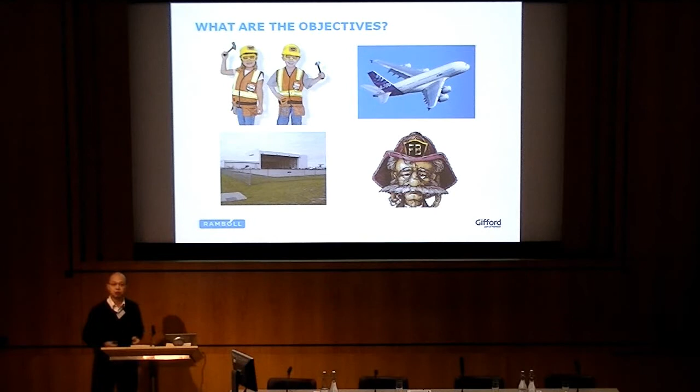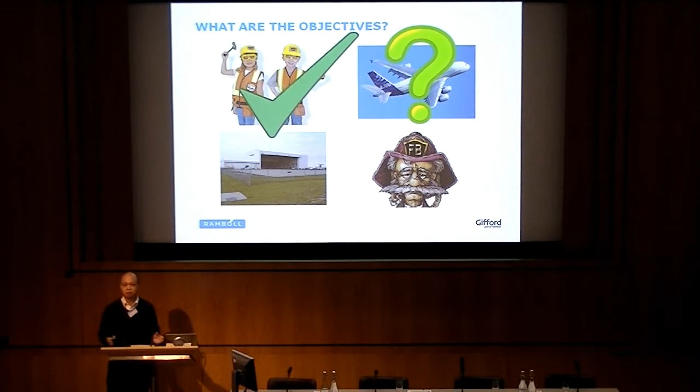When I think about what we need to protect, what is the fire strategy for? Definitely the workers - life safety is our fundamental principle of a fire strategy. And then, is the aircraft important? It's expensive, but is it important? If I never travel, it doesn't bother me. Is the hangar important? Can they do maintenance not in a hangar?

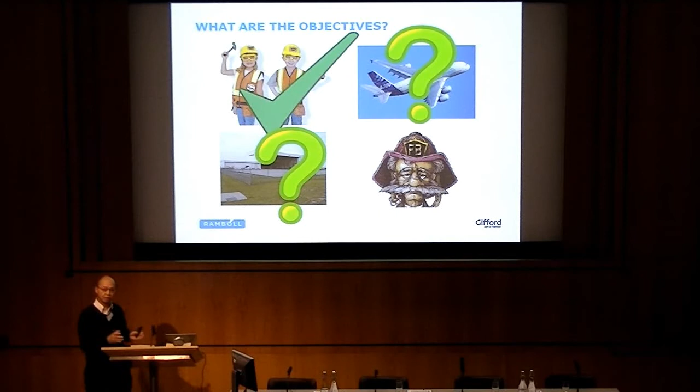And I will question, because it's property protection - it's the same, if I never travel, is it important to me? And fire brigade is also very important, but from their point of view, they would not go in if there's a fire. So at least I have the principle - life safety. But in terms of the aircraft and the hangar, I need to know what the clients want in order to develop our fire strategy.

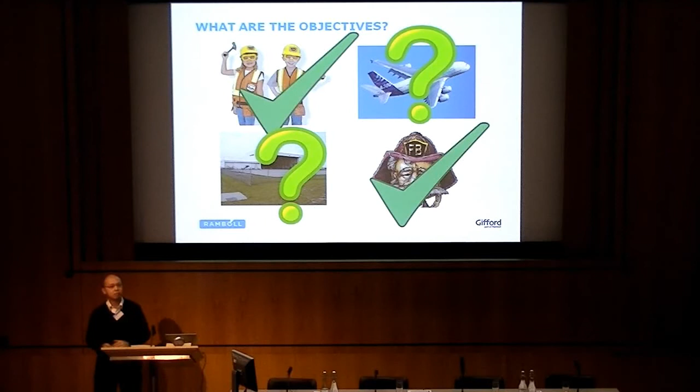What fire code do we use? In the UK, I guarantee there's no fire code related to a hangar, but it allows you to use the principle to develop a fire strategy. The UK likes to use passive fire protection, like putting in compartments and walls to seal everything off. But for a big hangar project, you can't put a wall in the middle. America has a specific code called NFPA 409, particularly designed for hangar projects, but they mainly use active fire protection. Okay, let's have a look.

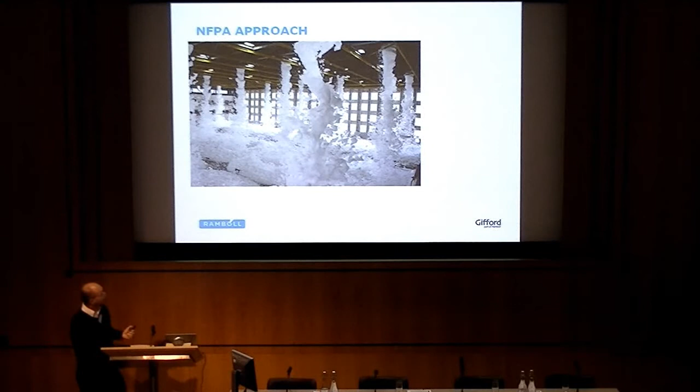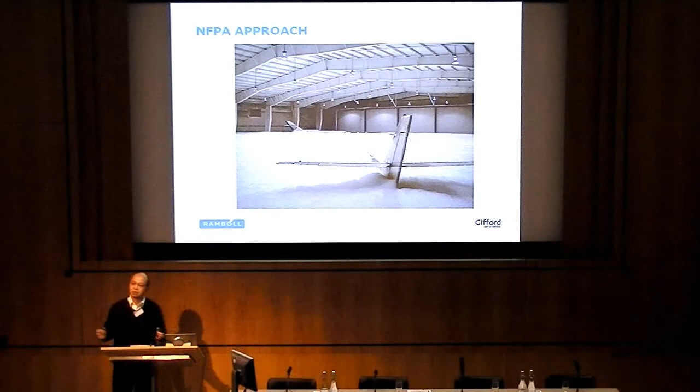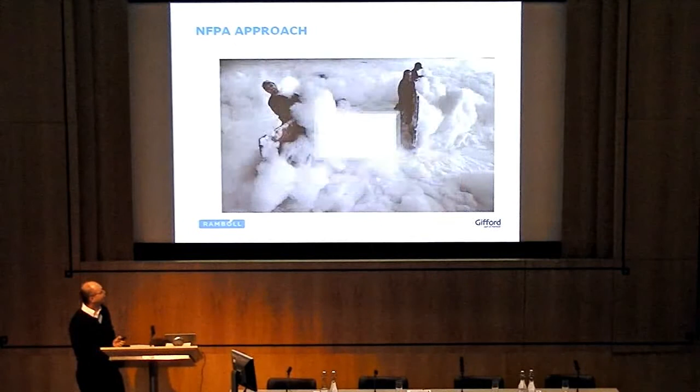And then the question comes up - if there's a little accident at the corner, it floods everything. Oh, I don't like it. And then the aftermath - yeah, it's bizarre.

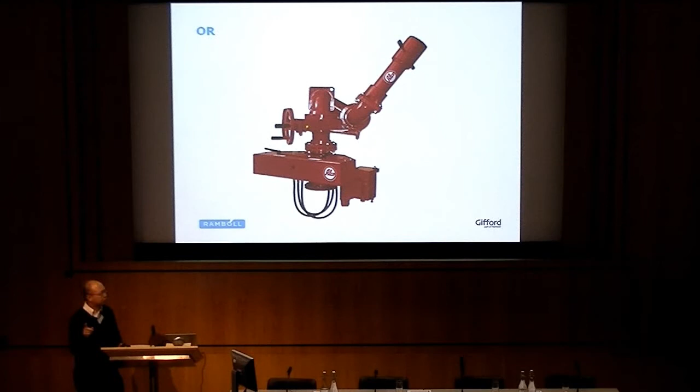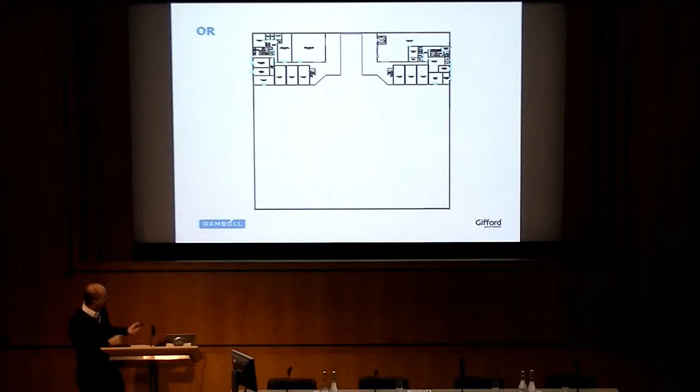And then there's an alternative, we call it an oscillating sort of nozzle. It's positioned in the best location - in case of a fire, it spreads the foam like that. This is the hangar, this part is where you park the airplane, and this is the back of house. It's strategically located in 4 positions, and if there's a fire, it spreads to cover the potential fuel spill location.

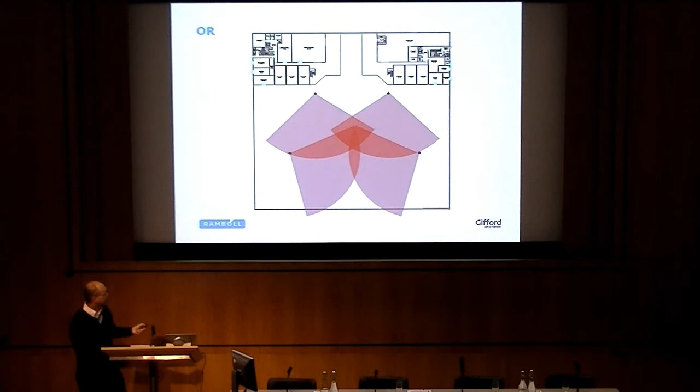Yeah, this is another example, and this is how we operate.

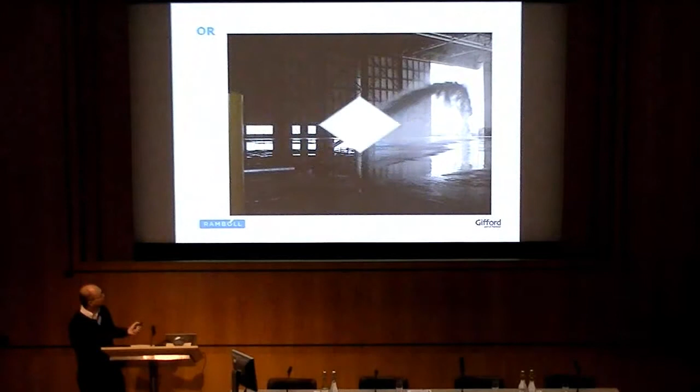Yeah, this is how we operate. But there's a problem: when you have a lot of stuff, you get blocked by your stuff. Although this is related to maintenance or management issues, it happens.

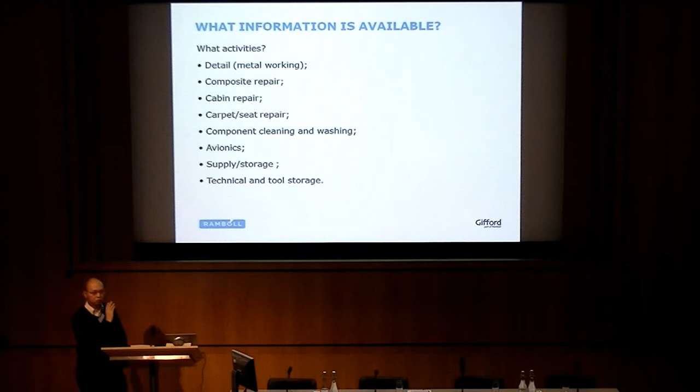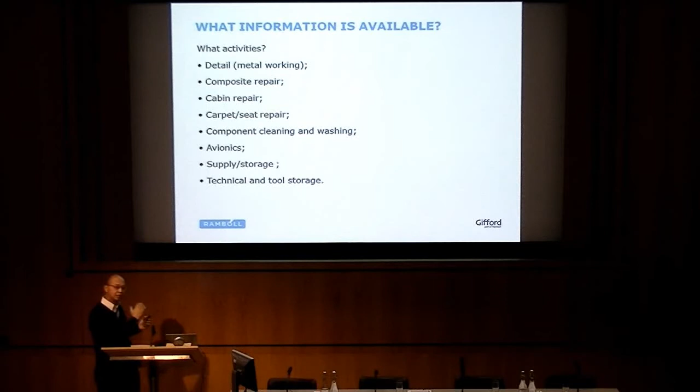We know the principle, we understand how it works, but is it necessary? I asked the client, asked the operators, read a lot of articles, and understood what activities they're going to do in the hangar. It's important to know, but we don't necessarily need to understand how every single thing works, and also what is given.

But the first thing is quite crucial, right? In the beginning of the project, they said it's only to park the airplane here, there will be no fuel. Then after 2 meetings, they came back and said, well, if there's an incident and the plane is ready to take off, that's a problem—they have to drive it in there. This means it will be full of fuel. So we have to consider fuel as well.

Fuel is the most likely source of a large fire load. I'll explain a bit later. Kerosene, Jet A—to be honest, it's really safe gasoline compared to the petrol we use, but it is less safe than diesel.

It's quite high, and we create a smoke reservoir so people can evacuate. The temperature at the roof is not likely to cause structural failure due to fire suppression, if the fire suppression works. I will prove whether it actually works or not.

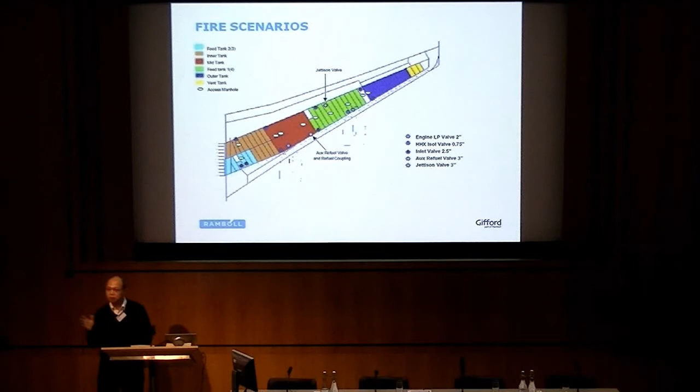After all the information I have, what is known, I need to start my research, start my data collection in order to do the first principle fire strategy.

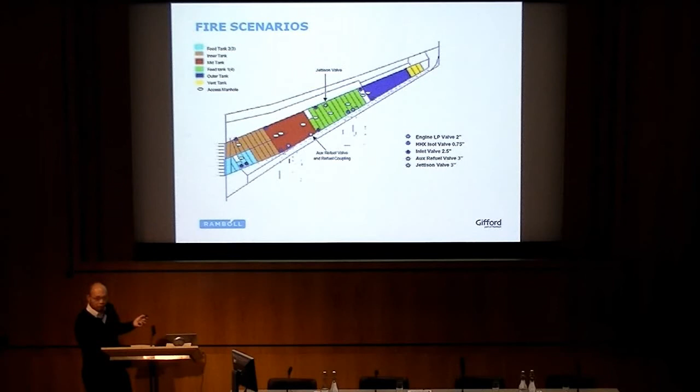After searching a lot of information, I found different fuel tanks, and the size, and how we're going to do maintenance. We ended up finding a tank with an inner tank of that size. The possible risk is when they maintain the coupling or the pump and that fails, then the gas or fuel from the tank will flow to the floor.

This is how the first engineering bit comes from—it's a conservation of energy, from potential energy into kinetic energy. Yeah, everyone knows that.

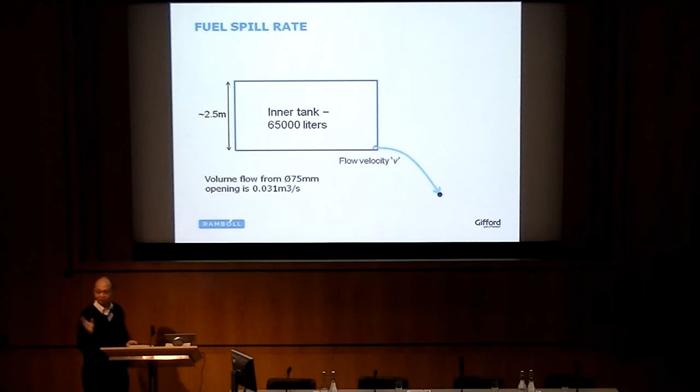What next? To be honest, this is the most difficult part. I tried to search, tried to find information—what happens if water type of things are put on the floor?

I did it with my team—I actually put water on the floor and asked, what do you think? It's really difficult to predict what happened.

The design team gave me 3 possible solutions in terms of the drainage system, for how to drain the water or whatever. Actually, the drain is to collect all the spilled fuel, and I don't know whether they reuse or recycle it.

This is the exact drainage strategy for Hangar 1—that's the one next to it. This is the leakage hole, and the potential fuel spill to the floor is that size.

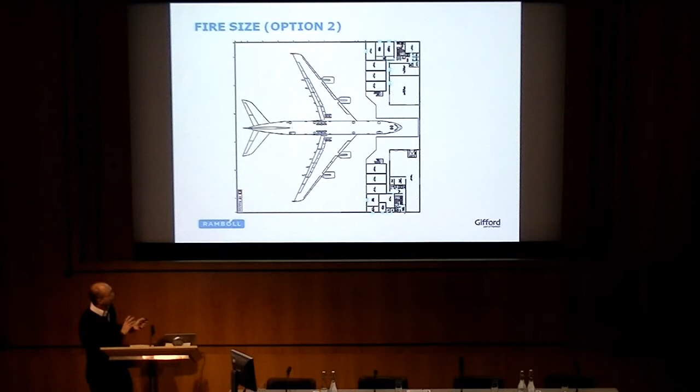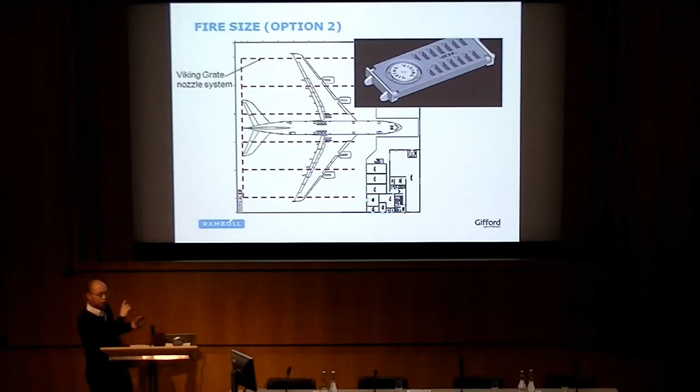For the next one, we found an interesting fire protection system called the Viking Grate Nozzle System—I'll show you the picture of how this works later. The potential fire size is beside that.

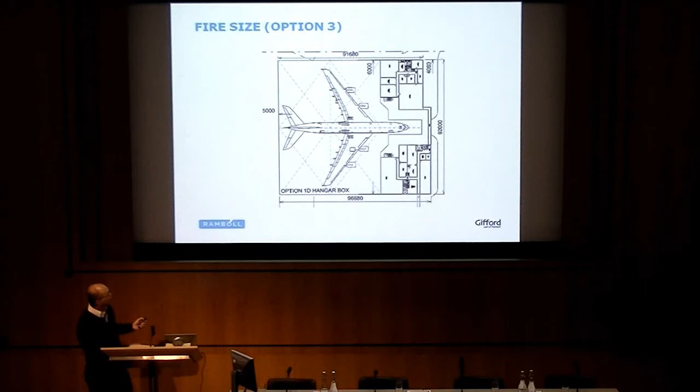The third one is what the design team proposed—4 locations, and there's a potential size for each.

This involves a lot of consideration, like whether the surface of the floor is smooth enough for the fuel to spread quicker, how thick the fuel is on the floor, and how quickly the fire spreads from one point to the whole fire size. There are a lot of questions to answer.

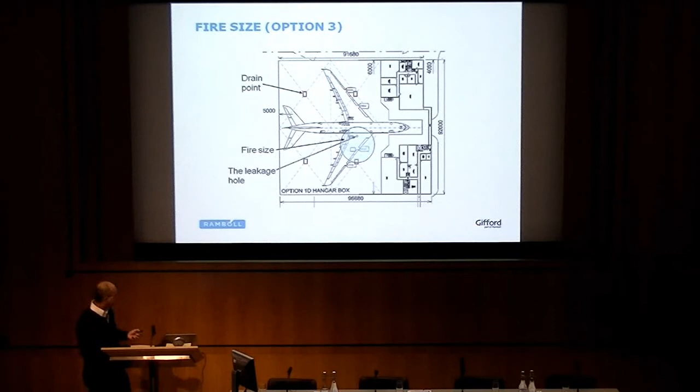But I managed to take that information, based on published data, research papers, and other information, and ended up with this summary of the fire scenario.

We know there's a tank size, and then we know the opening size. The way that it flows, 31 liters per second onto the floor. And then when we have a fire size, we have to apply a 155% factor when you do the heat release rate calculation, and end up with 398 megawatts.

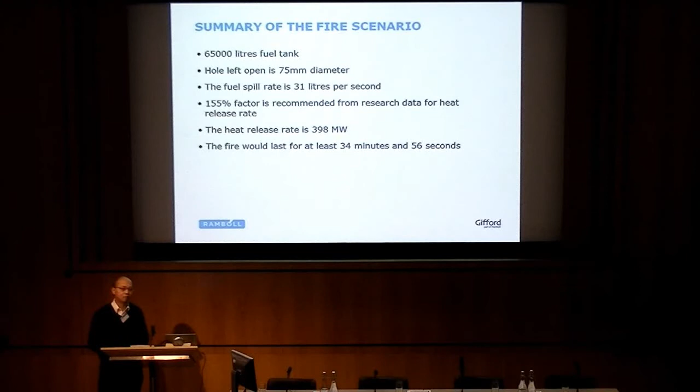I don't know if you've seen a normal car burn, yeah, you see a lot. That fire is talking about 4 to 8 megawatts, a normal car fire. And now we are dealing with 398 megawatts. It's huge, it's huge. When I got that result, I was frightened, like I am now.

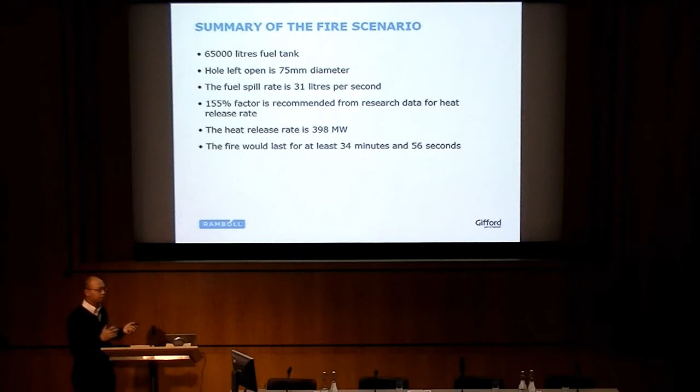And when I do all the calculation, that fire would last for 34 minutes. It's a really long time. Then will the hangar survive? Will the other things survive if the fire suppression system doesn't work?

And then I put it in a CFD because we can't do a test like Anton. We can't do tests, yeah. And the first 10 minutes is quite a crucial time to suppress the fire based on NFPA.

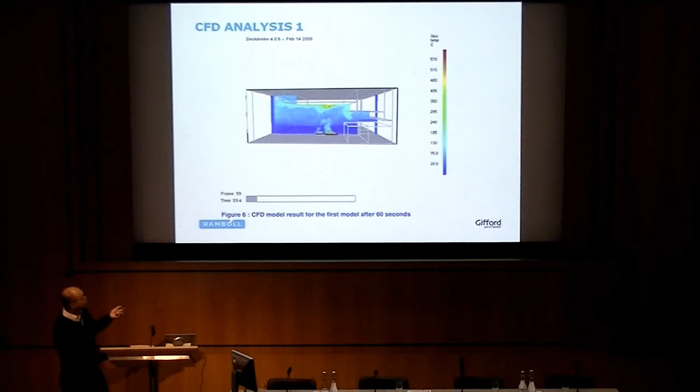And then I had a look, and you can see it's only a little bit here that is around 570 degrees. And the majority of the area or the volume is quite low, around 200. And the condition is the opening to outside, or the door to outside, fully open.

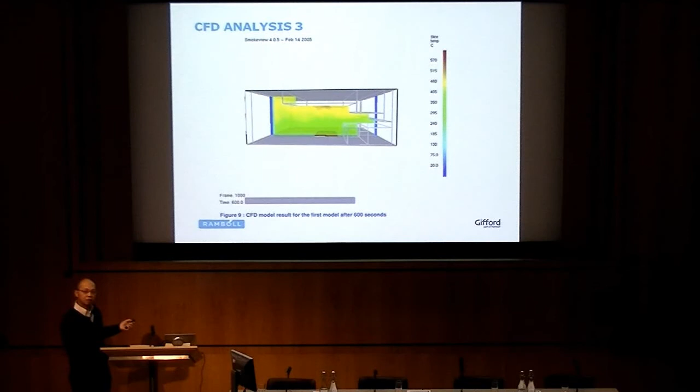And the temperature is reasonably low, and that's why from that we can say it's not necessary to do any steel protection to the roof. Yeah, it saves a lot of money.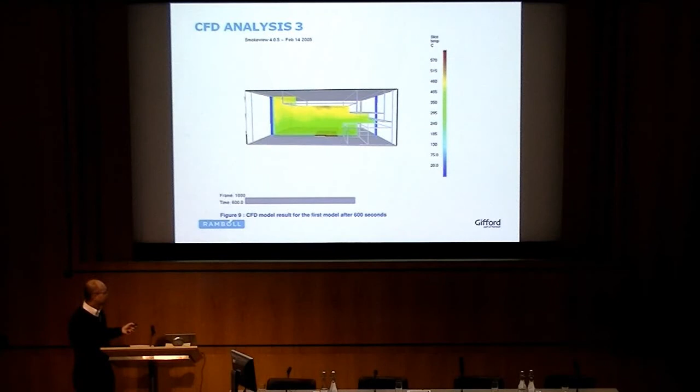After we've done that, and we understand how this works, we develop the fire size, and then we go to the fire detection system. This is different to a smoke detector or heat detector here.

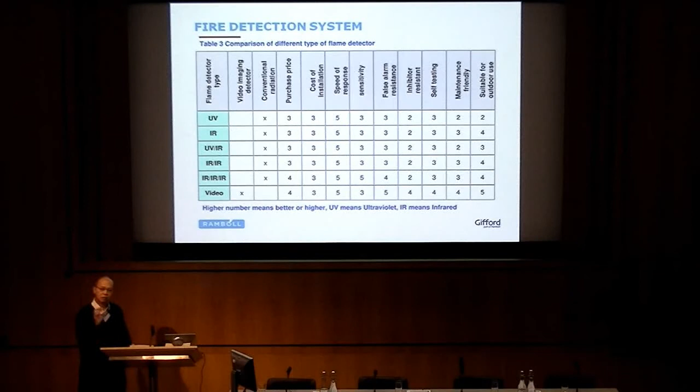It is really specific. We don't want sudden accidents. We don't want false alarms. Any false alarm will flood the place, and you can't use the hangar.

And then we also need to understand they do welding, they do hot surface things, they do some maintenance. You have to allow them to do something.

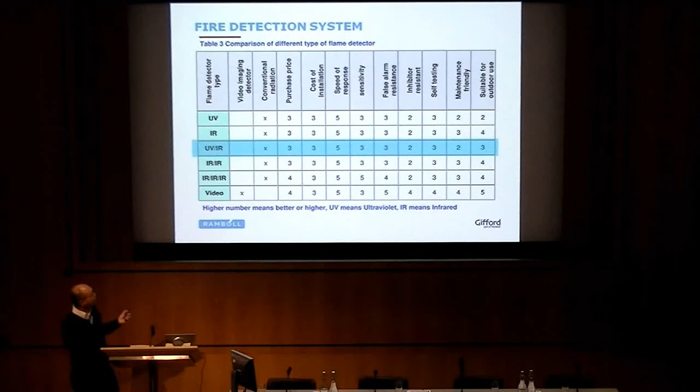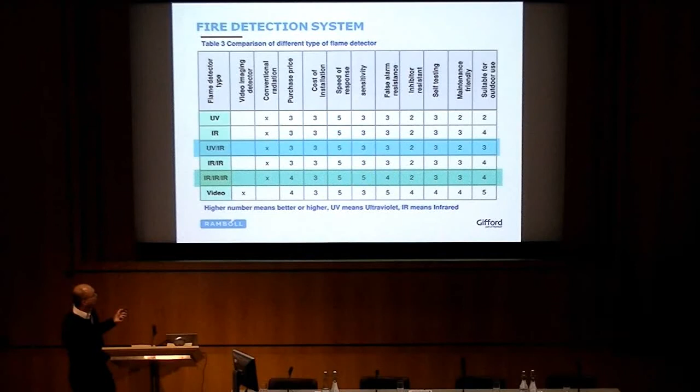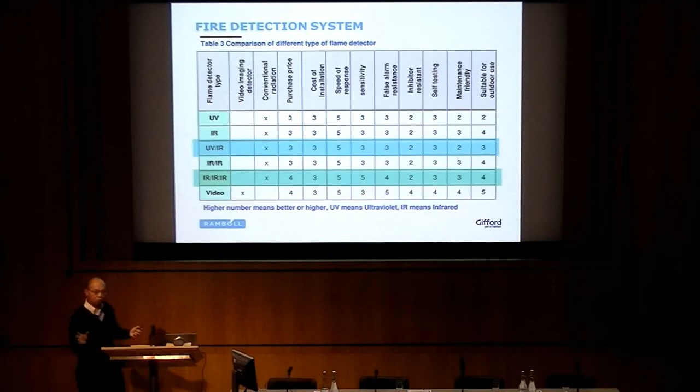And also at the same time, there was an accident at another airport where there was a training ground quite close to the hangar, and some of the detectors detected the training ground fire and flooded the whole hangar. We don't want that, and we think IR is a better solution.

And we also recommend a fire suppression system. This is the one that we saw before. And when there's a fire, because it's quite close to the fuel base, it will tackle the fire within 30 seconds. Yeah, and this is a new product.

We recommended that Kayan fly to America to have a look, and they ended up deciding not to build the hangar too. It's a shame.

But it's good that we told them there are things in the market that are new. It's important, it tackles the issue, and this is surely what they want. If not, they wouldn't have spent time going to America to see that design.

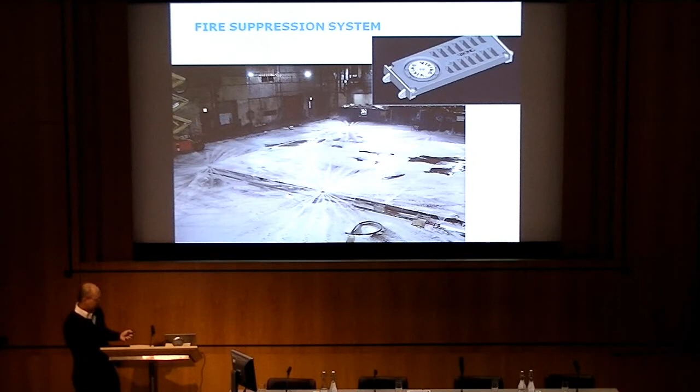And the conclusion: yes, we developed that from first principles. We understand the fire, how it developed, what is the incident, what is the risk, and then we provide options for different drainage systems, and definitely life safety has been considered, including fire brigade. And then we recommend the structure is not necessary to be rated.

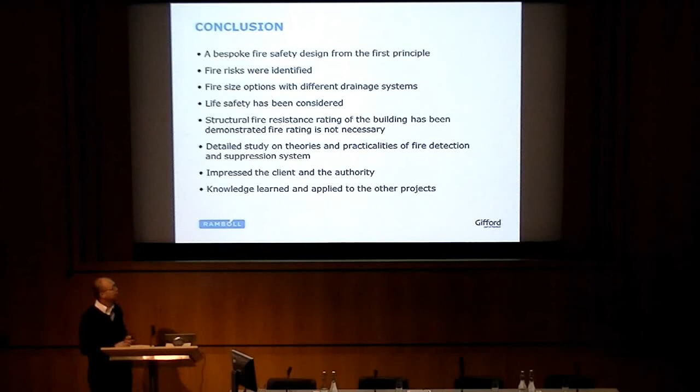And we used that knowledge to apply for the NDIA, which is the biggest hangar project on Earth at the moment. We managed to get the contract to do the review, and the project went successfully. Thank you.